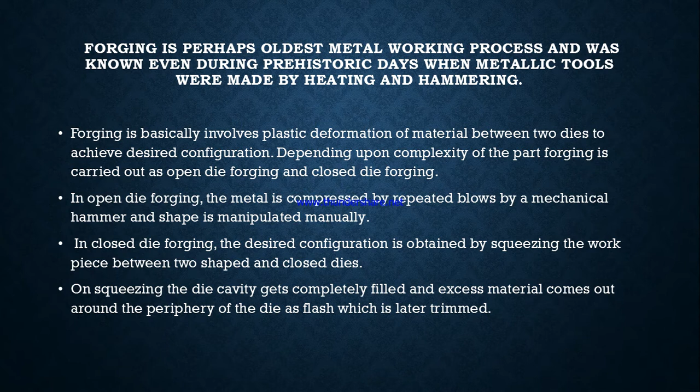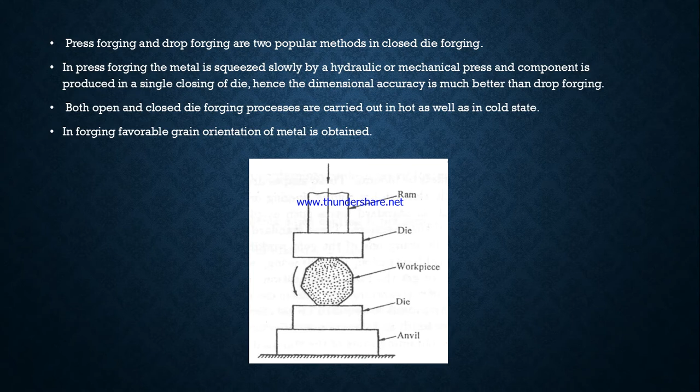Both open and closed die forging processes are carried out in hot as well as in cold state. In forging, favorable grain orientation of the metal is obtained. Now you can see the difference between open forging and closed forging. You have seen the open forging, now it is closed forging. In closed forging, you can see the shape of the object is actually retained in the two dies, and when they close, the shape is obtained by the pressure or by the dropping of hammers.

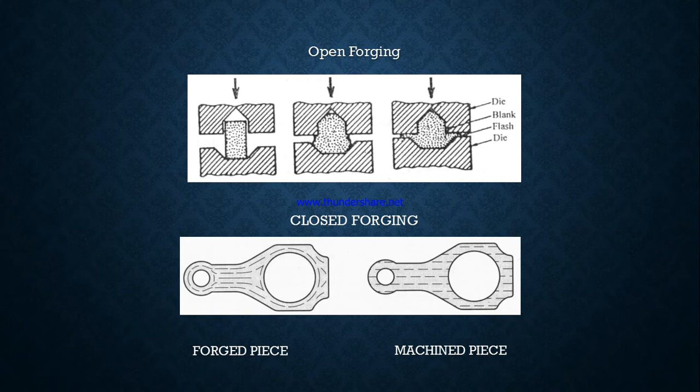The forged piece and machined piece are shown here side by side, and the grain is much better oriented in a forged piece than a machined piece, and that is why most of the load carrying members are made by the forging process. All load carrying parts like automobile crank, crankshaft, wheels, crane hooks are made by the forging process.

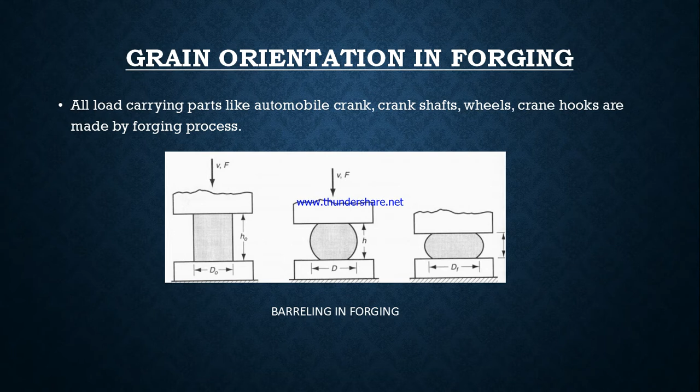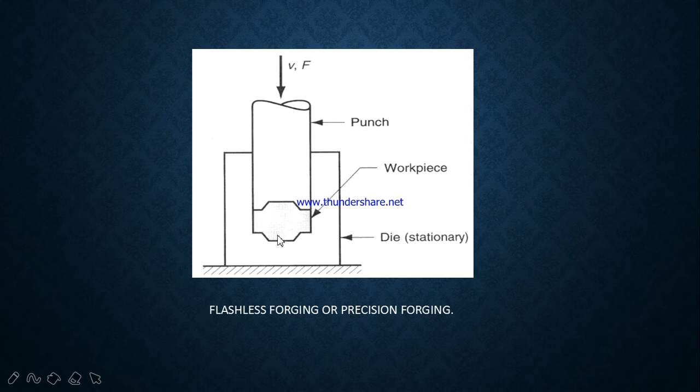Here we are showing barreling in forging, where the size is increasing while the height is reducing. This is the example of a flashless forging or a precision forging where there is no flash generated. The punch goes exactly into the die and the workpiece is obtained in the cavity between the die and the punch. There are different forging operations, say drawing, in which metal gets elongated with reduction in the cross section.

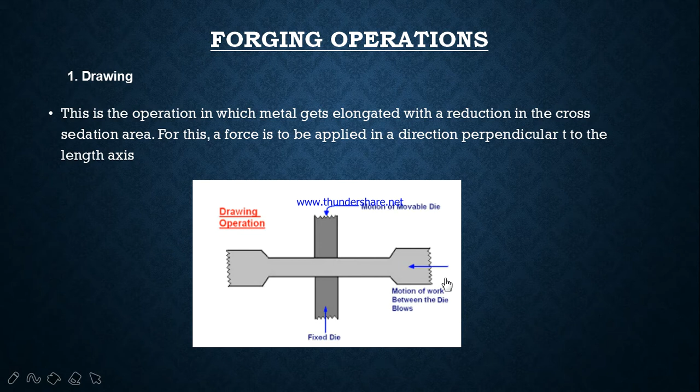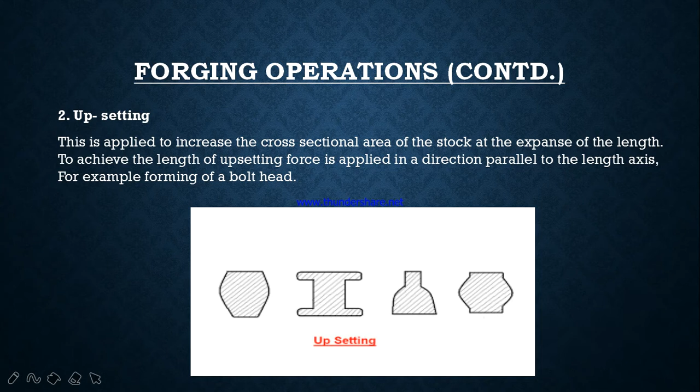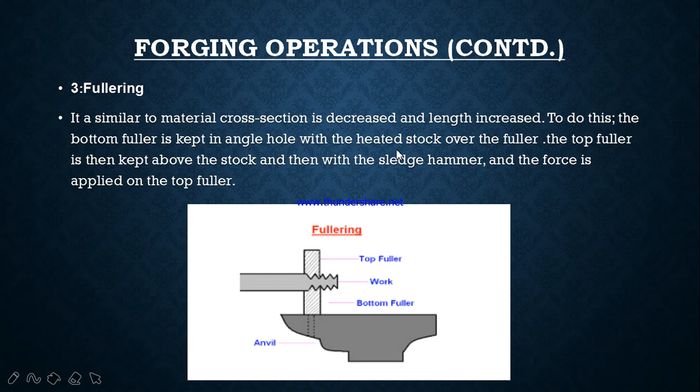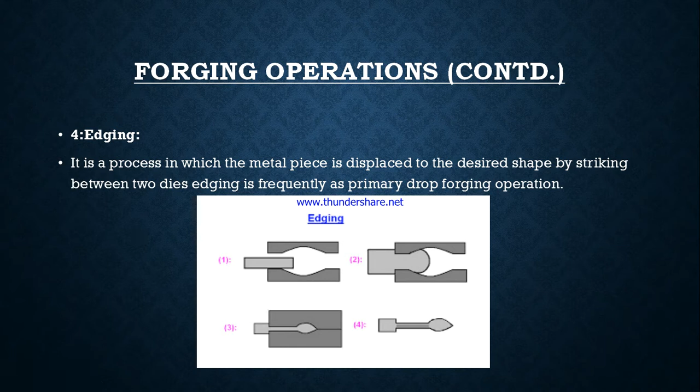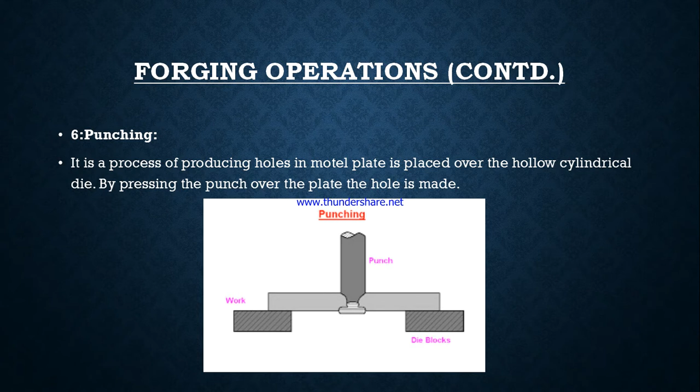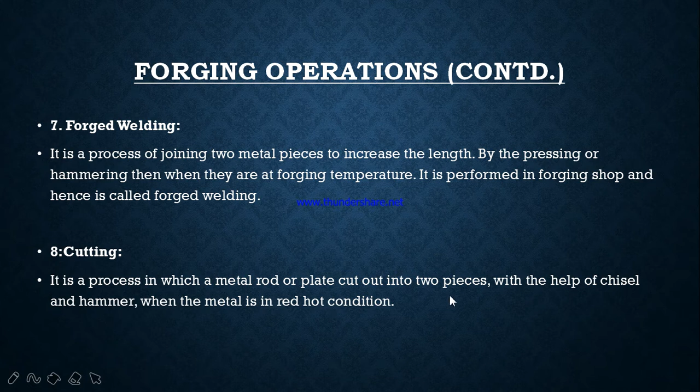Then edging. The edge is formed the way it is shown in the drawing. Bending is an operation which is very simple. It can be a right angle bend or bend at an angle. Punching operation, a hole can be created. Then there is forge welding, where two pieces can be joined in the red hot condition by giving pressure. Cutting is a process in which a metal rod or plate is cut into two pieces with the help of chisel and hammer when the metal is in red hot condition.

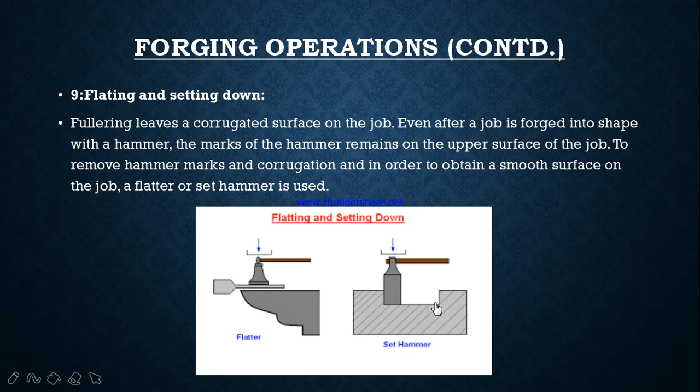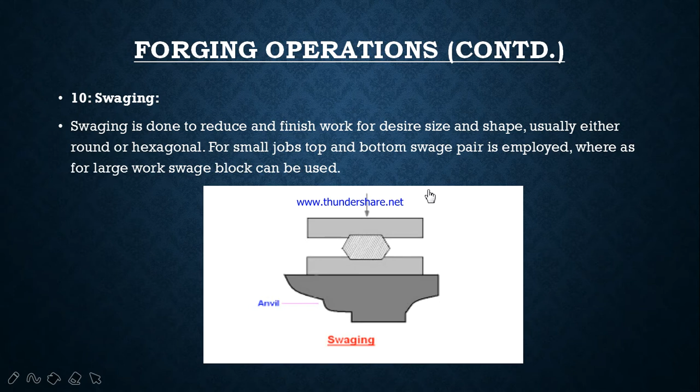Flatting and setting down. You can generate a flat with the help of a special hammer like this, or setting is done with the help of a setting hammer. Swaging. Swaging is done to reduce and finish work to desired size and shape, usually either round or hexagonal. For small jobs, a top and bottom swage pair is employed, whereas for large work, a swage block can be used.

The furnaces used in forging are box or batch type furnace, rotary hearth furnace, or continuous or conveyor furnace. The temperatures for low carbon steel are between 1250 to 1300 degrees centigrade initially, and finally 800 to 850 degrees centigrade. For high carbon steel, temperature required is a little lower, maybe 1100 to 1150 degrees centigrade and 800 to 900 degrees centigrade in finishing.

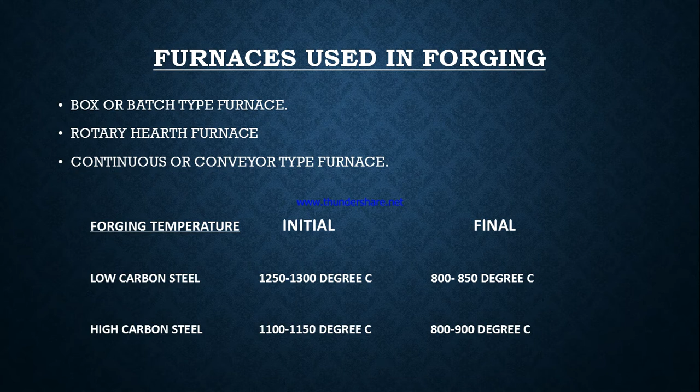Forging presses are: mechanical press, converts the rotation of the motor into linear motion of the ram. Hydraulic press, hydraulic motion of the piston moves the ram. Screw press, screw mechanism actuates the ram movement.

Now here, from this slide, we will take you to some of the video of the working of a forging press.

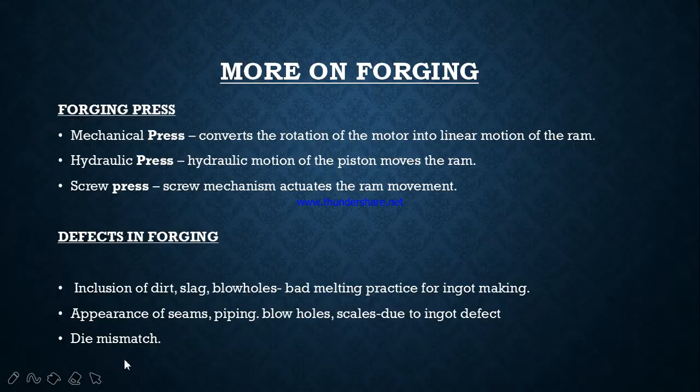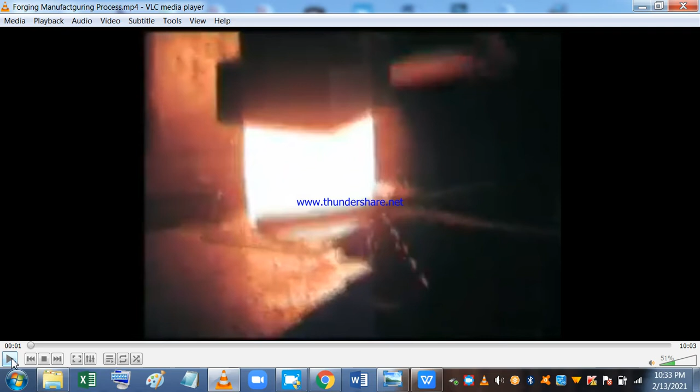You can see the forging process now. The red hot material is being hammered from the top, and with the help of a fork, it is being held in position. Continuously, this is actually one type of upsetting process. Continuously, the height is being lowered and the diameter is increasing. Watch the operation carefully.

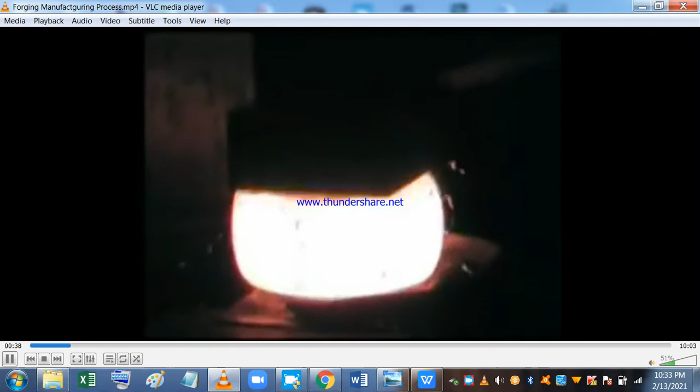Some of the scales that are being formed on the hot metal due to oxidation are being removed with the help of a scraper between the hammering operation. Continuously the scales are being removed. Otherwise the scales would have gone into the forging, resulting in a defective forging.

That particular block has become almost a flat ring now, much flatter ring. So now, actually there is a punching operation that is going on at the center. So it will create a hole at the center. Now they take the punch out, and further hammering will go on.

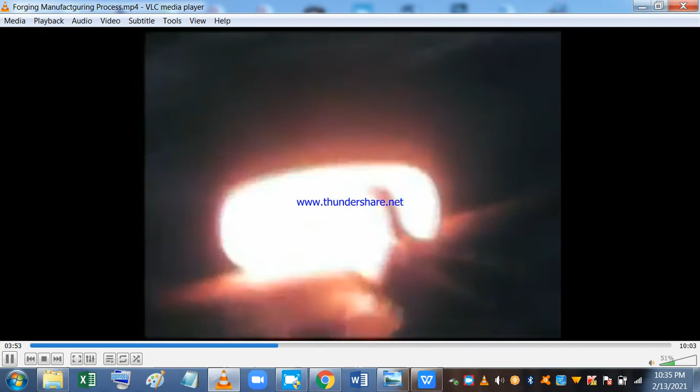Punching has been done from both sides now, and now possibly they are going to... see how it is loaded in the furnace. So because the temperature has come down, we put it into the furnace again, and they are now taking it out from the furnace for further processing. Because due to continuous hammering, the temperature also came down, so it has to be reheated at some point.

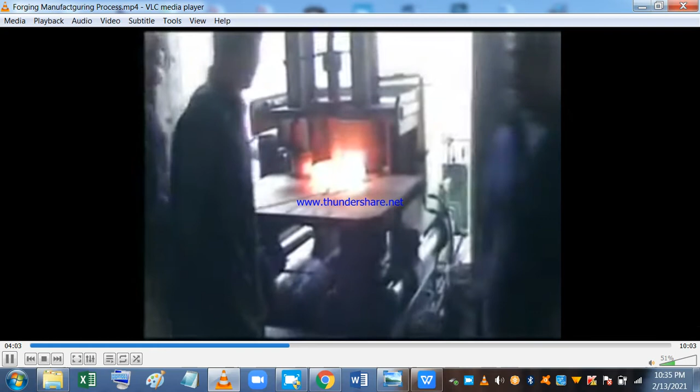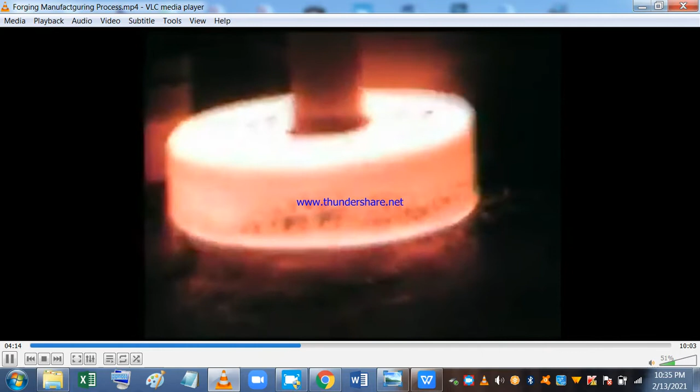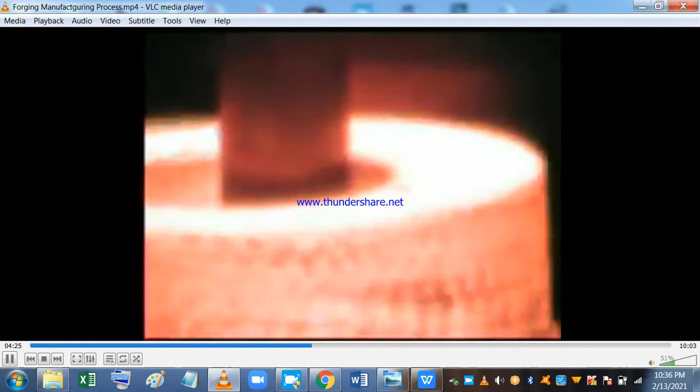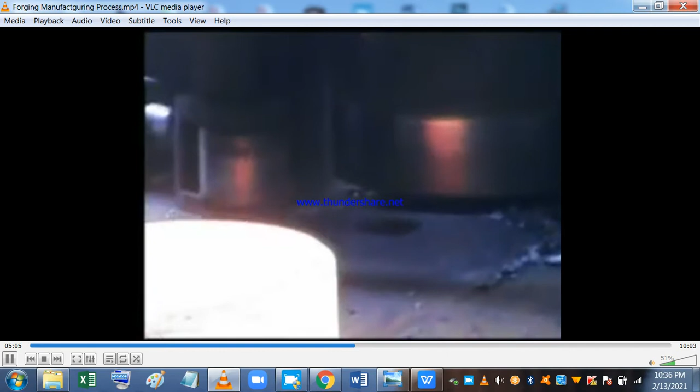Now we will see some rolling operation. You see, the inside diameter that was created by punching is being enlarged by rolling. This is the hot rolling process. The inside diameter is being increased. The job is rotating, and by pressing the roller, the inside diameter is getting increased. See, the inside diameter has now increased so much that it has almost become a ring now.

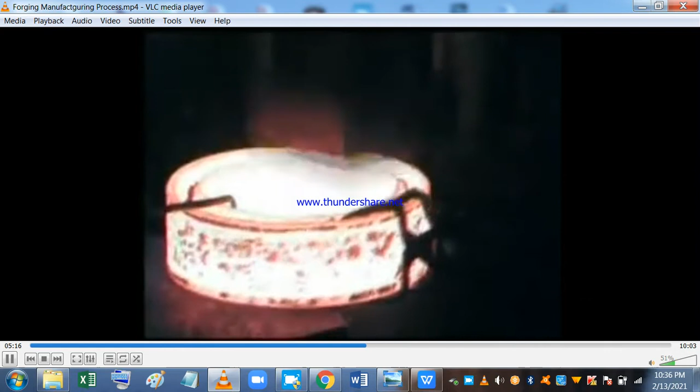So they are taking it to the drop hammer again, and further operations are being done. The previous operation was done on a hot rolling machine. It has almost achieved the shape of a ring now. Again hot rolling is being done to increase the inside diameter further.

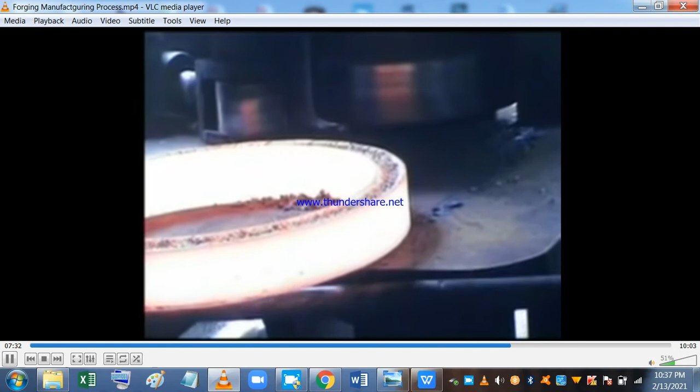The inside diameter is being checked now, whether we have really achieved the required inside diameter. And after this, further operation will be done. Reverse it now and hammer it and roll it. I think they will be doing further rolling. So further rolling is done to adjust. Possibly some more increase in the inner diameter is needed.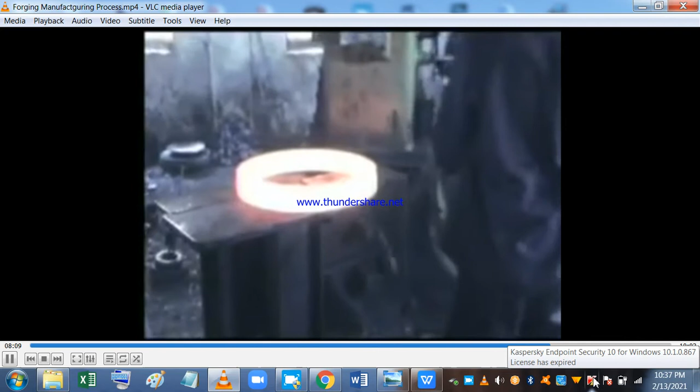Now they have taken it to a smaller hammer where this job is being finished. You don't need that much load now. So they have taken it to a smaller hammer. You can see the size of the hammer is smaller. So you remember the initial shape was a solid block. From the solid block they have made a ring out of the forging operation. Imagine the transformation in the shape that has taken place.

We are measuring the dimensions again. Taking it to the hammer again for some, oh no, we are taking it to the rolling again. Some measurement is going on, the outside and inside diameter. Measuring the thickness also with the help of outside caliper.

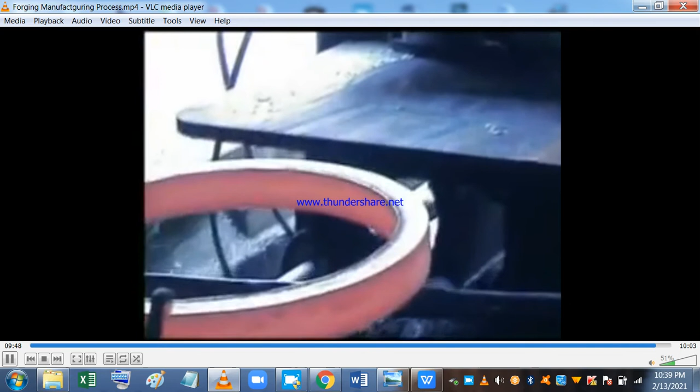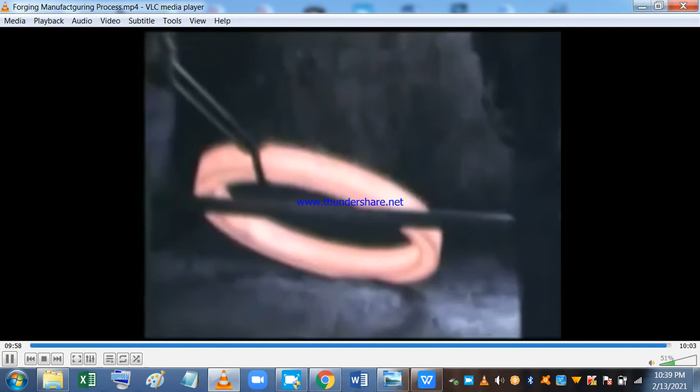It seems they have achieved the size and the ring is placed now for slow cooling. So the ring is ready. So by the forging operation, they have actually converted a block into a ring. You can imagine the change in the shape. That brings us to the end of this lecture.